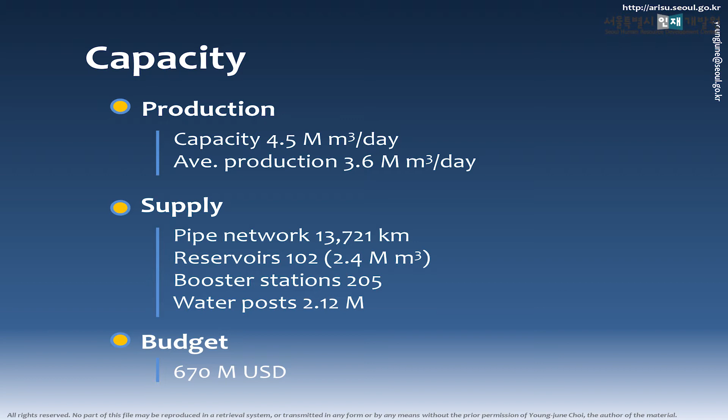Again, reservoirs, we have 102 reservoirs. Total size is 2.4 million cubic meters. And we have 2 million water posts, and the budget is about 700 million USD. This is the Water Cube used for the swimming competition in the Beijing Olympics. With 4.5 million cubic meters per day, which is the daily production capacity of Seoul, we can fill 2,500 Olympic-sized swimming pools with that water every day.

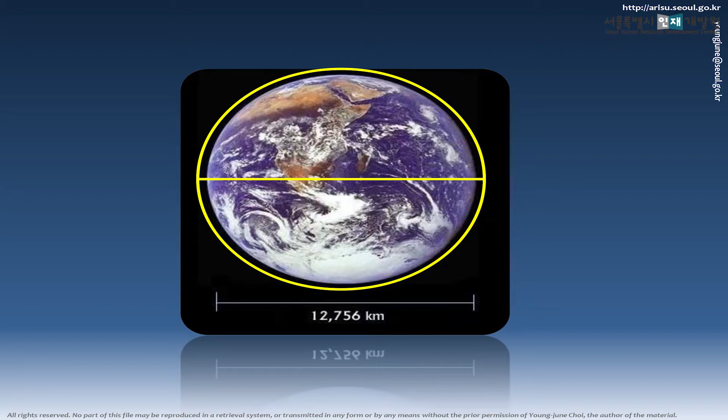The diameter of the Earth is about 13,000 kilometers. Do you remember? Pipe length in Seoul is about 14,000 kilometers. So it's a little bit longer than the diameter of the Earth. So we have a huge system.

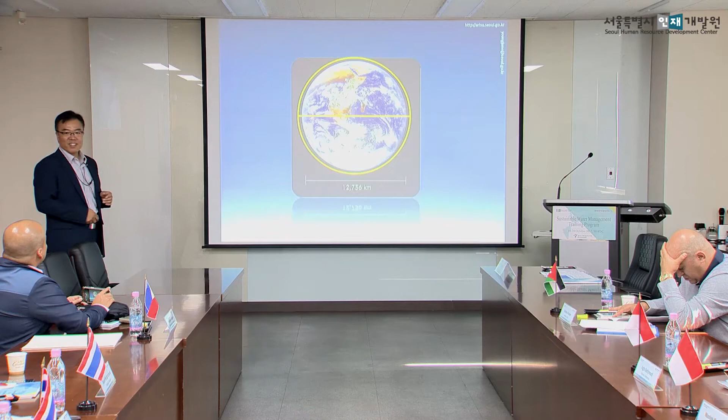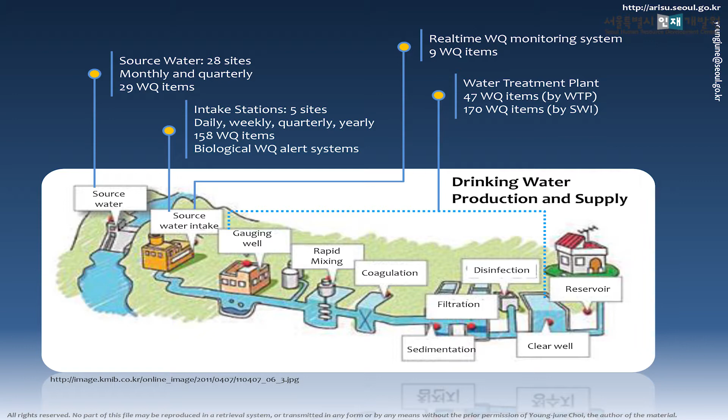So let's talk about water quality management. This is source water. From source water, this is the intake station. This is the gauging well. From this point, the water treatment plant starts, from this point to the clear well. Rapid mixing, coagulation, sedimentation, filtration, disinfection, and clear well. And the water is pumped to the reservoir and to the citizens. So from source to tap, we do water quality monitoring periodically.

So we control 170 water quality items periodically, like daily, weekly, monthly. You can read the data, like we have 450 sites for water quality monitoring at the tap. Supply system, we have 70 sites. It's quarterly monitored, something like that. So we do water quality monitoring like this.

And do you remember I said, even though the Han River is inside of Seoul, we cannot control it. It's controlled by the central government, but we monitor it. So if there is some problem in the water quality or quantity, then we can let the central government know about it with the data. So we have to monitor it, even though we cannot control it.

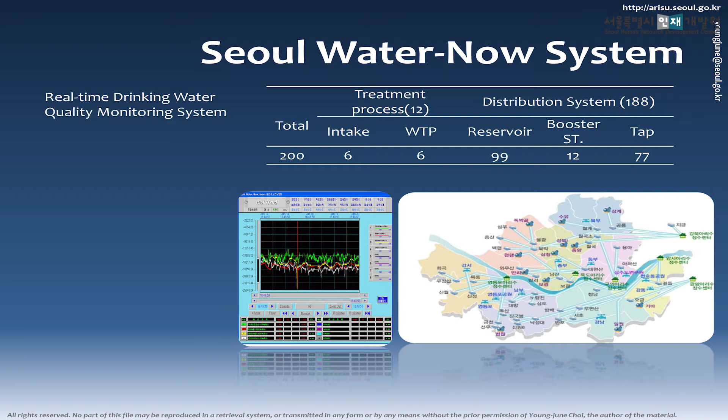We have the real-time water quality monitoring system, so-called Seoul Water-Now System. We installed real-time water quality measuring devices in Seoul, 200 devices from the source water to the tap. And we can have real-time data about the water quality. And that data is sent to the internet, so it's open to the public. So citizens can check the water quality anytime, anywhere, if they have access to the internet. So it says it's good to drink, and there is turbidity, pH, residual chlorine and other water qualities. And the data is open via smartphone and electronic boards also.

And we have a water flow monitoring system. Are you familiar with the DMA, District Metered Area? We divided the whole of Seoul into small units.

And the smallest unit is DMA, the small DMA. We have 2,100 small DMAs, and about 100 DMAs make a middle-sized DMA. And every middle-sized DMA has a flow meter, so we can monitor the water flow in real time.

And the water quality, pressure, and flow data is integrated into an integrated information system, so we can monitor and control the system. So they have a production management system, supply management, a remote operating monitoring component, and a real-time water quality monitoring system. And also they have CCTV, so they can check the site with naked eyes.

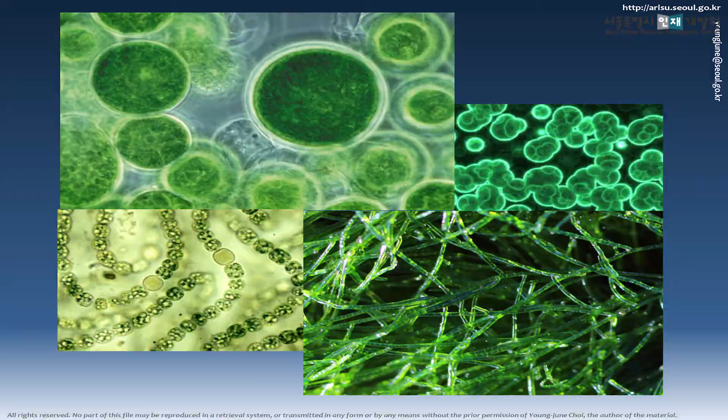Algae is actually a kind of plant, not a plant, but it's a kind of plant. That's why they are green, because they have chlorophyll and photosynthesis. But there is a phenomenon called eutrophication, which is caused by nutrients like phosphorus and nitrogen. If the river has too much nitrogen and phosphorus, then the algae bloom.

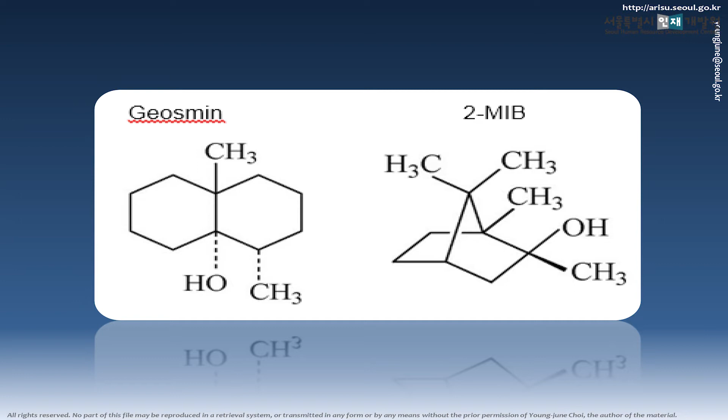If there is algae in your water, it smells earthy or musty, or smells and tastes tough. It's not harmful, but it's not good to drink or smell. That's because of these two chemicals. Because of climate change, the Han River has more algae, and we have a problem treating the source water with the algae because of these two chemicals. It's hard to treat with the conventional treatment process.

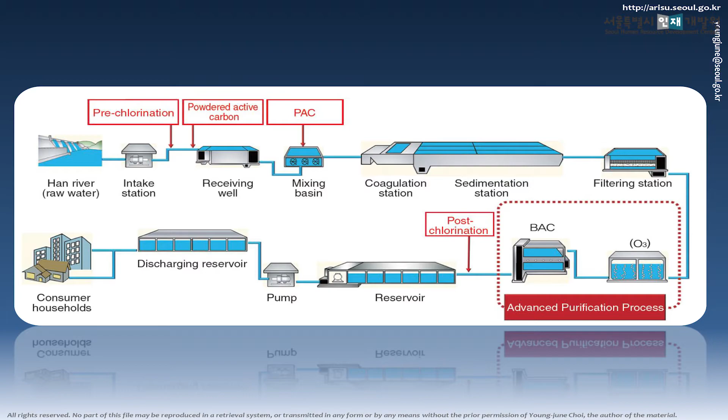This is a conventional system: mixing, coagulation, sedimentation, filtration, and we add ozone and GAC, granular activated carbon, to treat those two chemicals, 2-MIB and geosmin, produced by algae. This is carbon, actually activated carbon. It's called activated because we developed more spaces.

Actually, it's called a pore, inside of the carbon. It's different from ordinary carbon because it has a lot of pores inside. So it means the carbon has a huge surface area. When we spread out all the pores inside this amount of carbon, we can make a soccer field. So it has a lot of surface area, which means it can absorb bad chemicals easily. That's why we use carbon to absorb 2-MIB and geosmin.

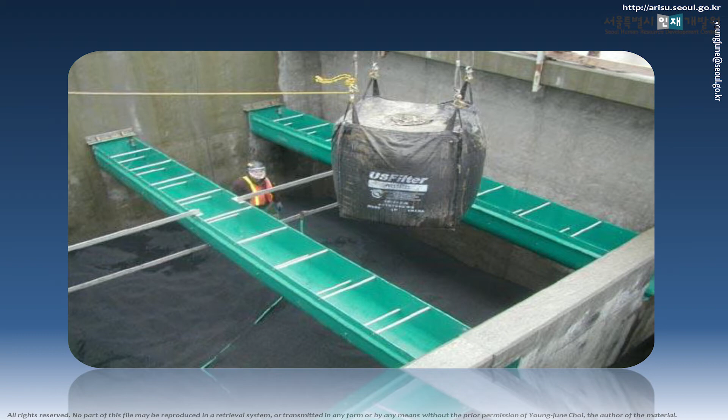The red line is the 2-MIB concentration in the Han River. It goes like this. And the blue line is the concentration of 2-MIB after the water is treated by the conventional process. As you can see, we cannot remove 2-MIB, right? But the green line, with the ozone and GAC, we can reduce it down to 10 nanograms per liter.

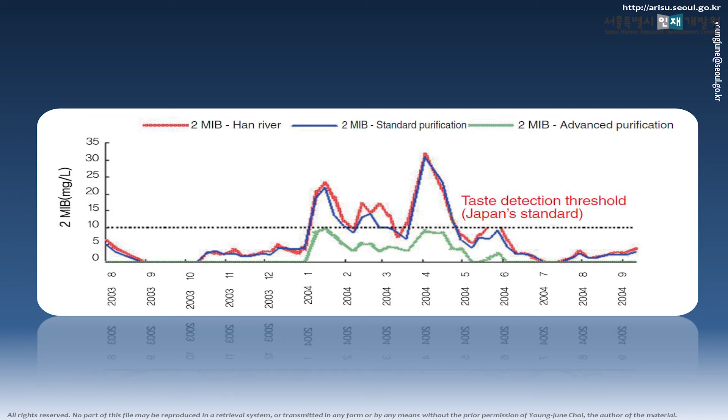Okay, let's talk about revenue to water ratio. Only two countries, Korea and Japan, use revenue to water ratio. Internationally, we use NRW, non-revenue water, or UFW, unaccounted for water. RWR is kind of the opposite concept of NRW. The definition of RWR is the ratio of the volume of water paid by customers to the volume of water we supply to citizens. I think this is related to the efficiency of the system.

In 1989, the city launched a special organization dedicated to water, which is Seoul Water Authority. When they started their business, the RWR was about 55%, which means 45% was lost, right? This is the ratio of water paid by citizens. So at that time, 45% of water was lost.

But we increased it, as you can see. So right now it's 95%, which means NRW is about 5%. But you have to remember, is this high number good? Very good.

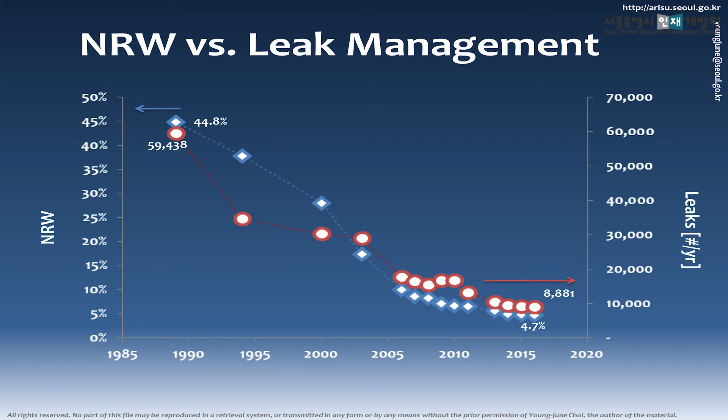Actually, there were 60,000 cases a year in 1989 when the Seoul Water Authority started its business. There were 60,000 leak cases detected in a year, but it decreased to one-tenth of the cases with leak management. It's NRW and leak cases. And remember this system? It helped to control water pressure, so we could reduce the leakage with the system.

And another management strategy was the block system. We call this block, but actually it's the same as DMA. Before we renovated the system, it looked like this. This is the plant, and water is supplied to the citizens. This is a house. It looks like a tree, right? The tree system has two problems.

One is pressure at the extremity, at the end of the system. And also the water at the end of the system can be deteriorated because it's stagnant here. So two problems, pressure and quality. So the city changed the system into a circular one. Then we can balance the pressure, right? And also, as the water circulates in the system, we can control quality too. So we changed it from a tree shape into a circular one.

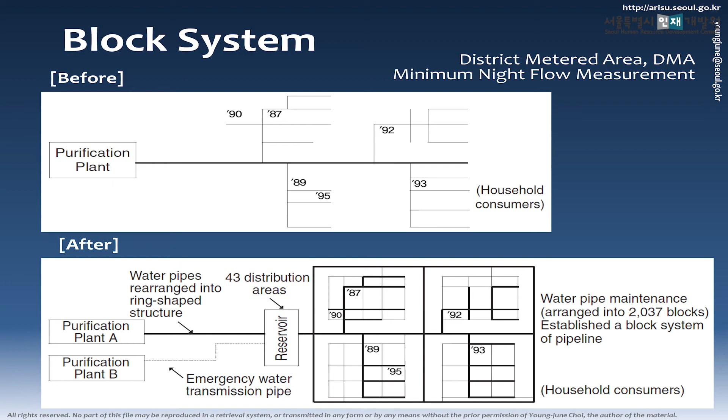And do you remember we have 2,100 small DMAs, the unit DMA or block, and the block is not flat, because we use gravity to distribute water. So every district is divided by the flat, and also we have to consider the elevation. And we use some leak detection methods, I think acoustic, the sound, noise. So I think you have the same techniques.

And also, do you remember we have a flow monitoring system for every mid-sized DMA, so we can find out if there is leaking in the system. If we find some pressure difference or flow difference in a mid-sized DMA, then we go into the smaller one and check everything. Actually, before we installed the water flow monitoring system for mid-sized DMAs, we checked all the leakage in 2,100 small DMAs. When we finished that project, we monitor only the mid-size.

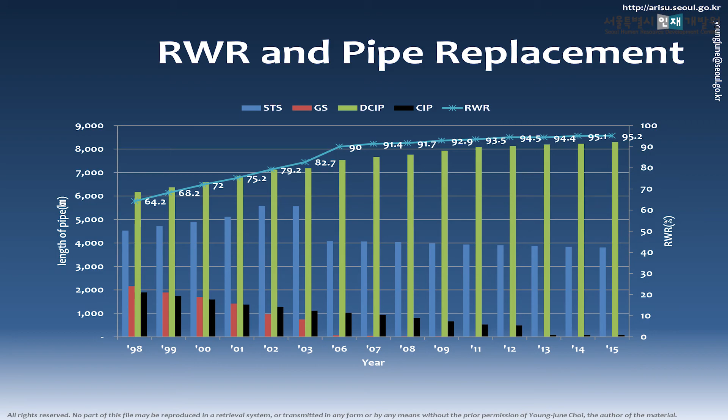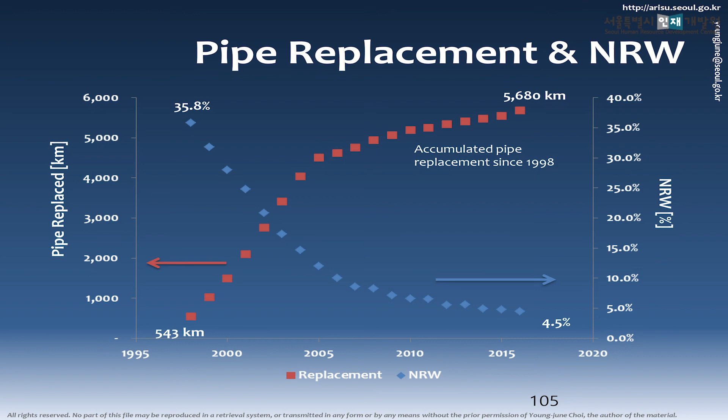Do you understand? At the first stage, we checked all the leakage for 2,000 small DMAs. And after that, we only measure the water flow for the mid-size right now, because 2,000 is too much for us. And the most effective one is replacing the old pipe. This is the accumulative pipe replacement. This is NRW. So the more old pipe is replaced, the more we can reduce the NRW.

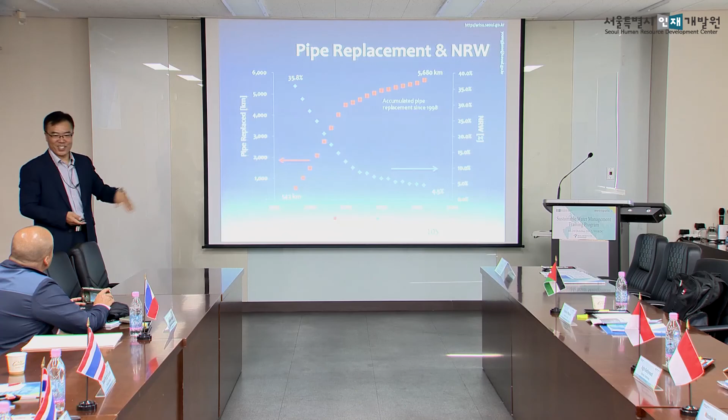Actually, do you remember the 14,000 kilometers of water pipe in Seoul? About 97.7% of old pipe is replaced with new one. The project started in 1984, which means the first one is 37 years old right now, so we have to change it again, right? So it's a kind of circulation. So by increasing RWR or decreasing NRW, we could save a lot of money.

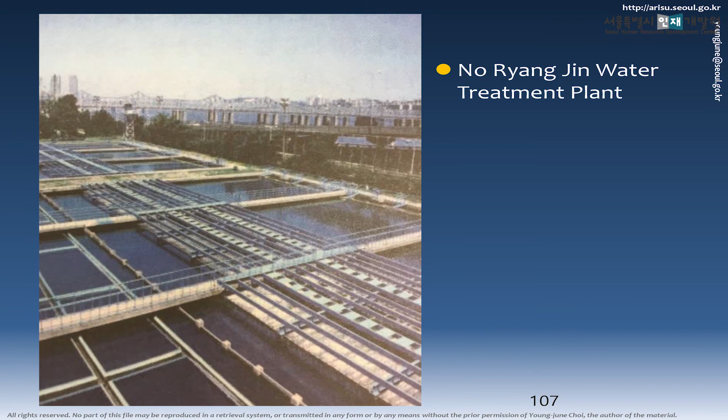And also we could decrease production. Actually, we had 10 water treatment plants in Seoul. We could decrease it to 6 water treatment plants, and also we can save budget. 4 water treatment plants are closed, right? Because we reduced the number of water treatment plants from 10 to 6. This is one of the closed water treatment plants, the Noryangjin water treatment plant. It's changed into a park, like this.

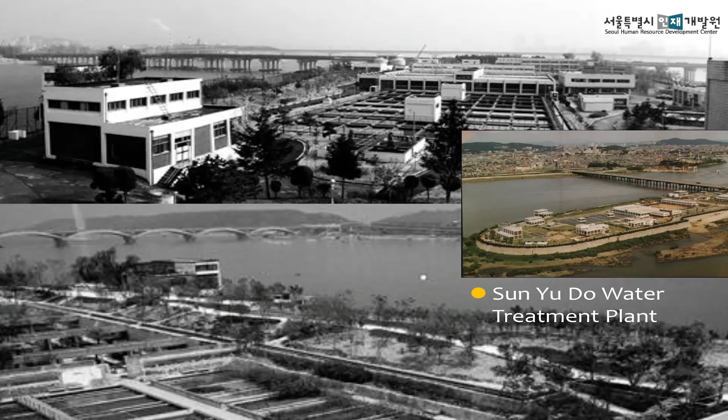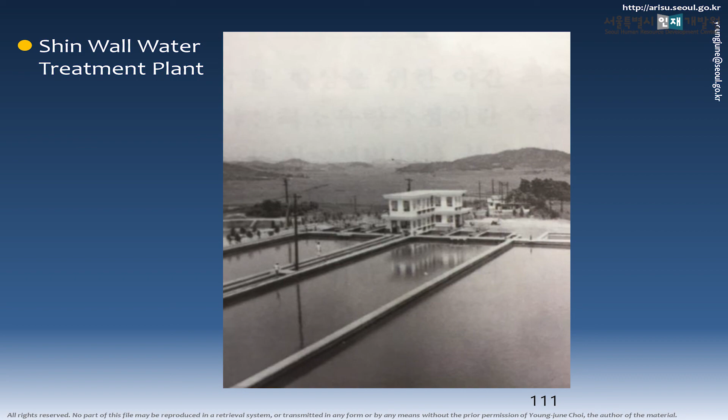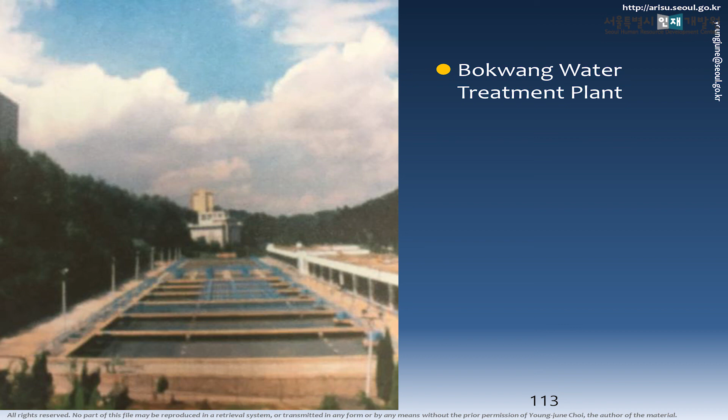And this is another water treatment plant which was built on a small island in the Han River, the Seonyudo water treatment plant. This plant is closed and changed into a park. You can still see the structure of the water treatment plant, right? Here. These are all the structures used for producing drinking water. And another closed one, the Shinwal water treatment plant, is changed into another park. You can see the structures still; we use the structures to make the park. Another, the Bogwang water treatment plant, is changed into a school.